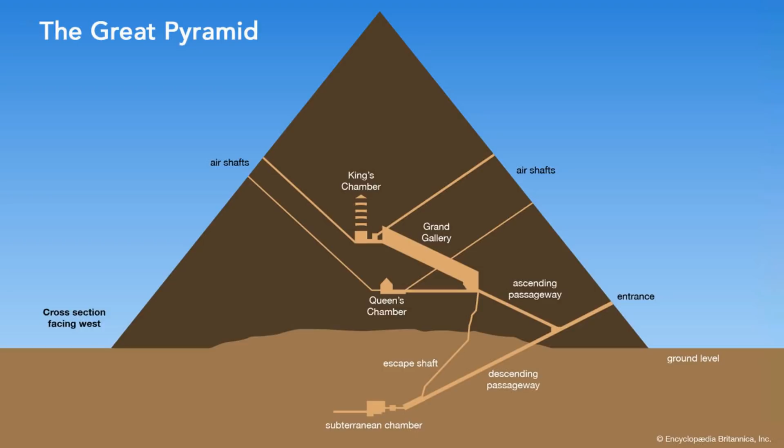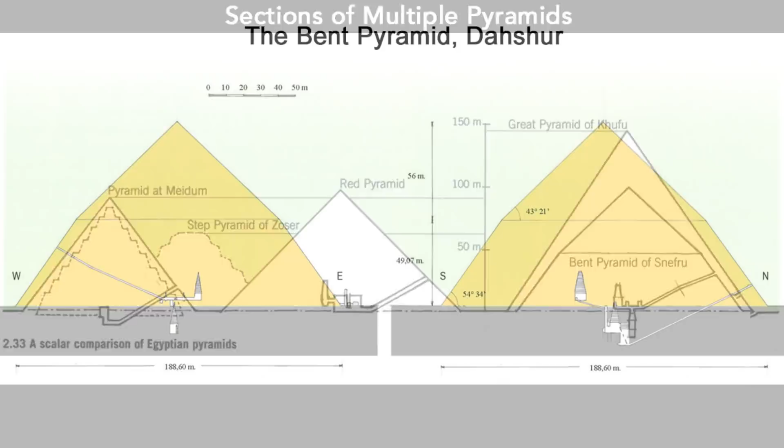The Great Pyramid of Giza is the only one that has connecting above and underground chambers and passageways, while other large-scale pyramids do not have the same internal structures as the Great Pyramid. They have minimal openings and remain almost entirely solid, sitting on top of underground chambers. Who would build such massive objects that one can't even use?

Even for the Great Pyramid, if the goal was to create chambers and passageways, then it was completely unnecessary to pile up all these stone blocks. If the builders just skipped every 10 blocks or so, a lot of labor would have been saved, and the structural integrity wouldn't have been compromised. Then why would the ancient builders choose to employ so much labor and building material? Unless it was their intention to pack as much material as possible into one place.

The way these pyramids were constructed indicates that they were designed to contain as many blocks as possible. This could be their function, which was to safely store enormous amounts of blocks. So what kinds of blocks need to be stored this way? In an earlier video, I pointed out that the large-scale shafts and underground chambers on the Giza Plateau might belong to an ancient underground mine.

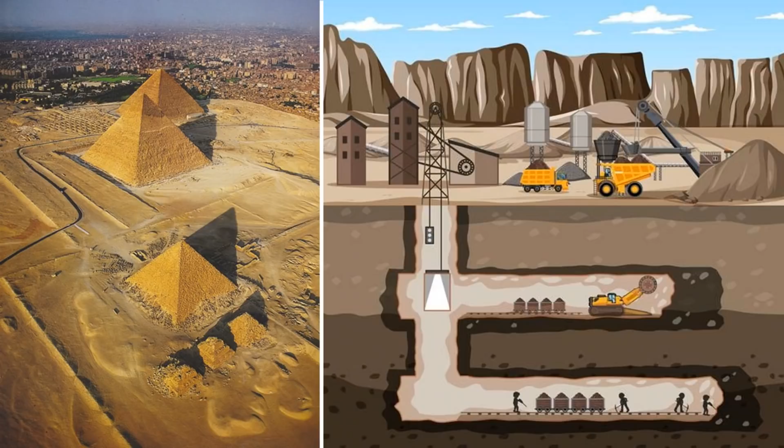These shafts are very close to the pyramids. The Great Pyramid shared the same tool marks with the Osiris shaft. It's conceivable there was a fundamental connection between the Giza pyramids and the underground mining system. If these ancient shafts on the Giza Plateau were excavated for mining, then what possible role could the pyramids have played in this complex operation?

Some have gotten my hints from the last video, my theory being the pyramids might be carefully constructed mine tailing and waste rock storage piles. What? I know. It might sound outrageous because the Giza pyramids are such pivotal symbols to us. Calling them mine waste dumps or slag heaps is just plain offensive.

Even though emotionally it's hard for me to accept, this tailing storage theory did derive from my research. I was never inclined from the start to conclude the way I did, but all my research points in that direction. Imagine if all humans suddenly disappeared today. Tens of thousands of years in the future, what would be recognizable to prove the existence of our civilization?

Skyscrapers? No. Modern structures require regular maintenance and repair. Once the maintenance ends, the buildings would eventually collapse. However, earthly structures such as mines and rock-cut caves would last the longest. The megalithic sites that stir up so much interest among us are probably the bare bones of a previous advanced civilization. If the Egyptian pyramids were really intended as mine waste storage, it actually proves that this ancient civilization was so advanced that today's technology is far from reaching their level.

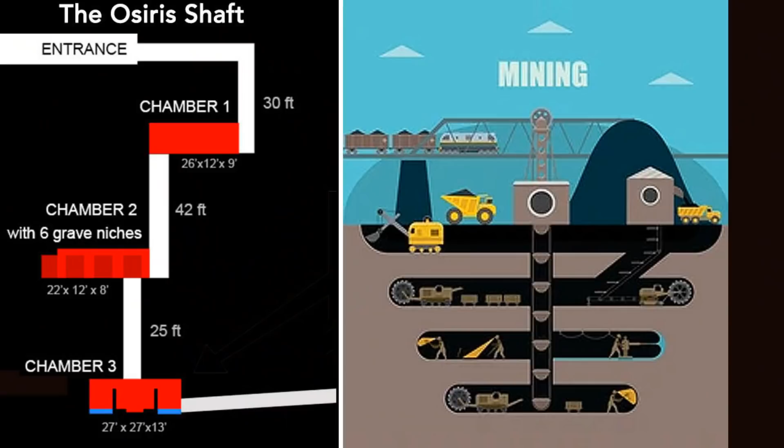Let me explain my reasons, and afterwards you can make a judgment call on whether my theory has merit. First, let's take a look at some typical mine sections. We can see the shafts, which are similar to the Giza shafts, the underground passageways to the ore, and on the ground we can see something in a pyramid shape. That's a pile of mine tailings or waste rock.

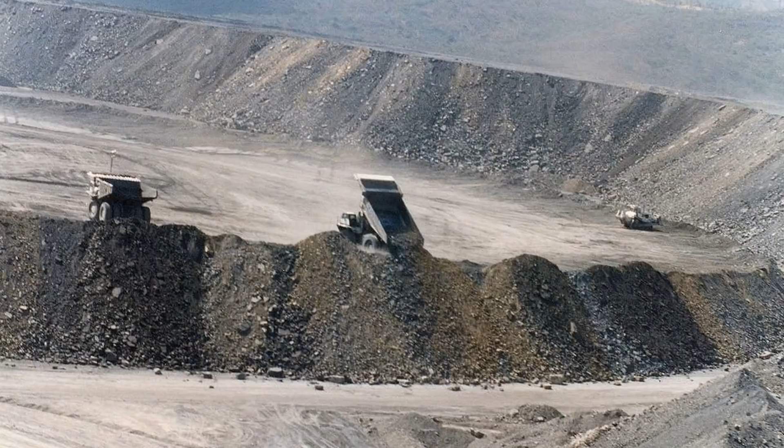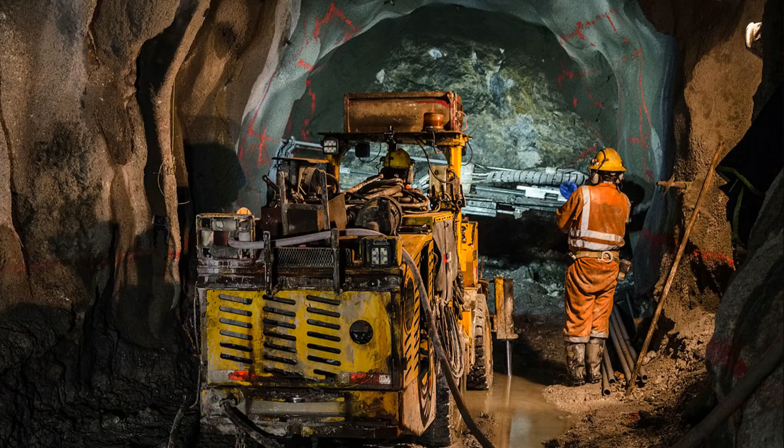Mining produces a lot of waste. When one catches a glimpse of any mining operation, in most cases, you'll likely only notice the mine waste because the majority of the actual operation is underground. When metal is mined, it typically is mixed with other rocks.

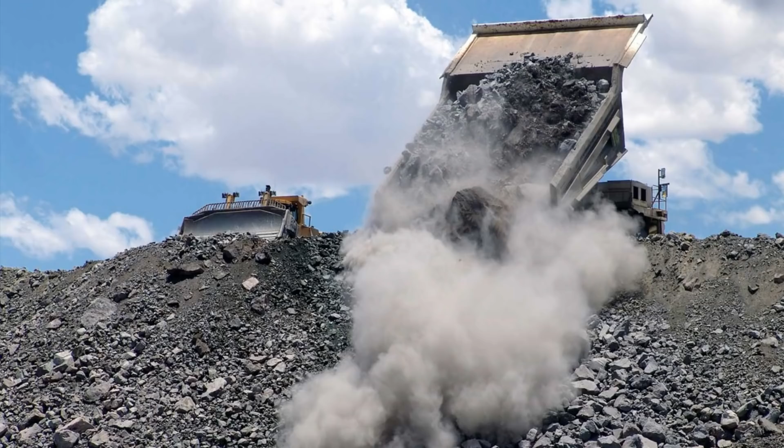Chemicals, such as cyanide, are usually used to separate metal from ore. Once the metal is removed from the rock, the excess rock becomes waste rock. Other than waste rock, the extracting process also produces mine tailings. Tailings are finely ground rocks and other mineral waste.

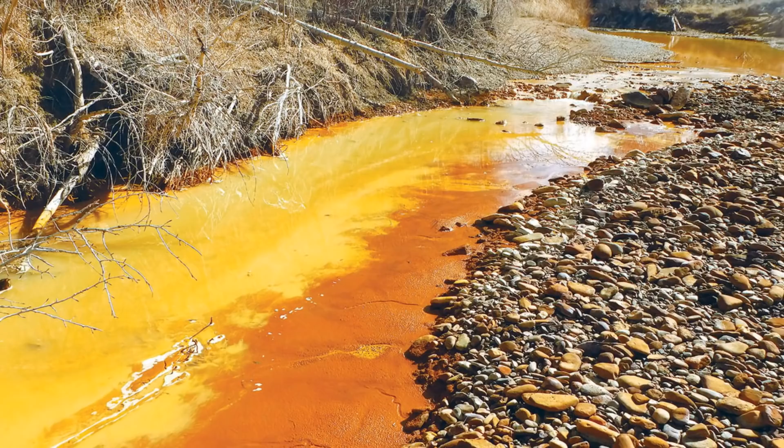Waste rock and tailings generally have little to no use and thus are disposed of. Due to the way minerals are processed, tailings and waste rock can contain concentrations of chemicals. If not properly handled, hazardous and toxic material from mine waste, such as heavy metals, acidic water, and chemicals, can be released into the environment. Because mines are usually operated in great scales, massive areas of soil, land, groundwater, and aquifers could be potentially polluted, which would cause major public health problems.

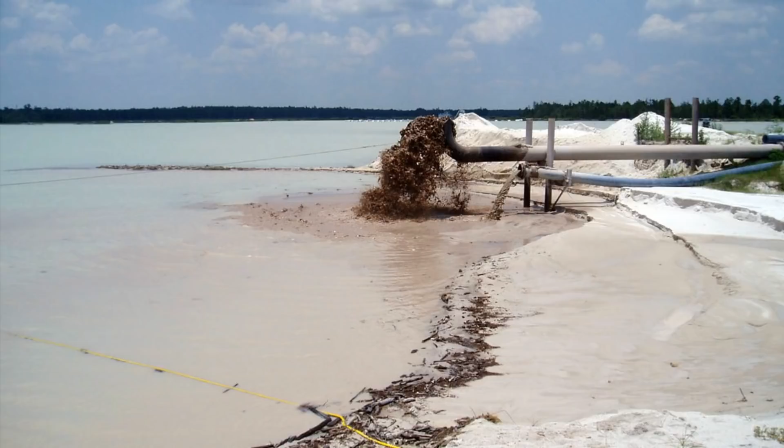Sadly, the mining industries have historically used the simplest and cheapest methods to manage mine waste, which is to dump them directly into rivers and lakes or pile them up on ground or in pits. Wind and rainwater then spread the contaminants to local and downstream soil and water sources. This is a disastrous way to store mine waste.

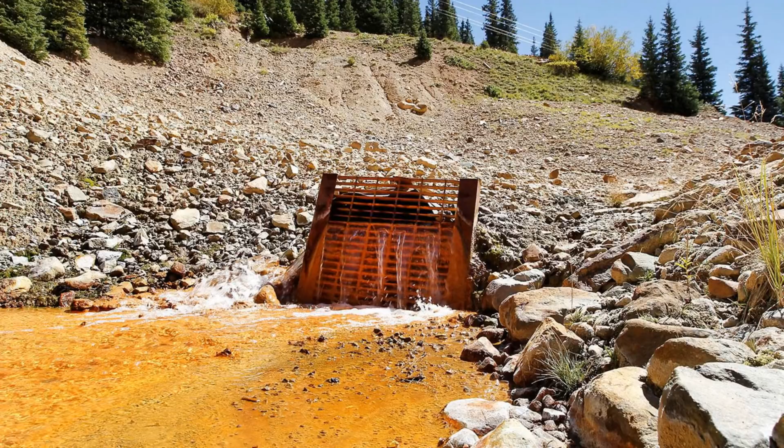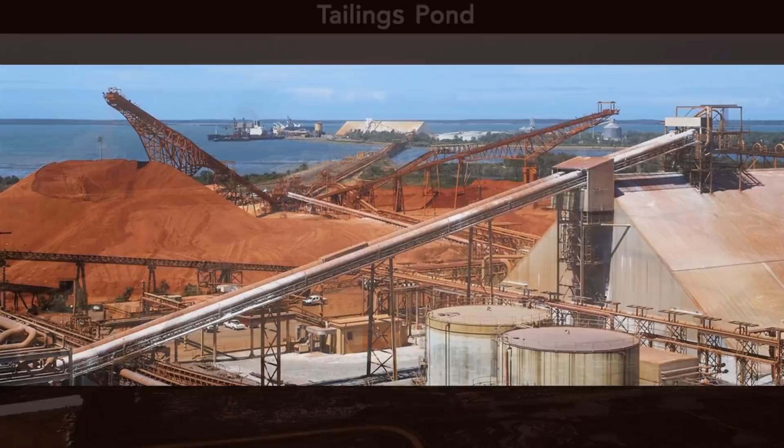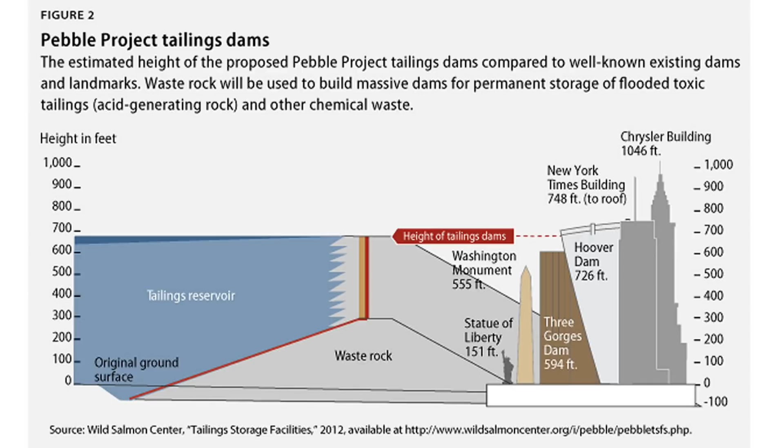Since the mid-20th century, the mine industries were pressured to eliminate older ways of waste dumping and look for safer, environmentally friendly technologies. The most common method of managing tailings today is stockpiling tailings slurries in tailings ponds. Some of the largest tailings ponds are over several miles in diameter and hundreds of feet deep. Tailings ponds are not only ugly to look at, but dangerous.

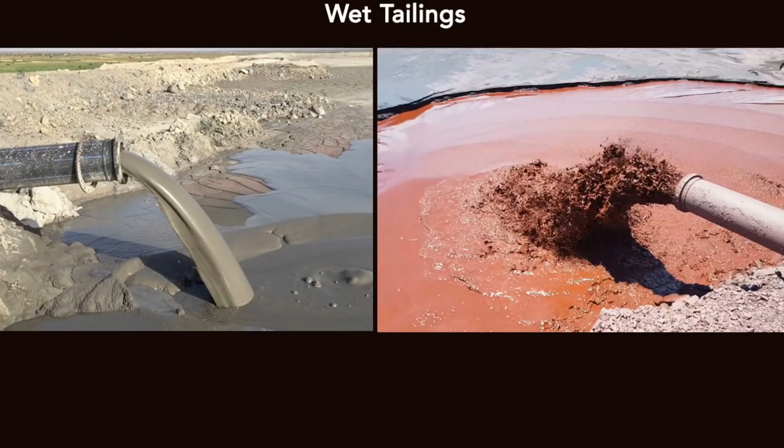There have been several catastrophic large tailings pond failures. In addition to the loss of up to several hundred human lives, these major failures have contaminated and destroyed large areas of land and caused major ground and waterway pollution. So building tailings ponds is not an ideal way to store mine tailings. How can we permanently and safely store mine waste?

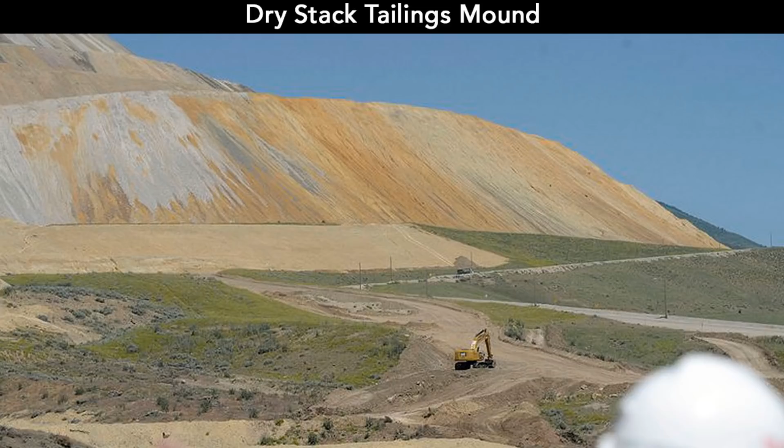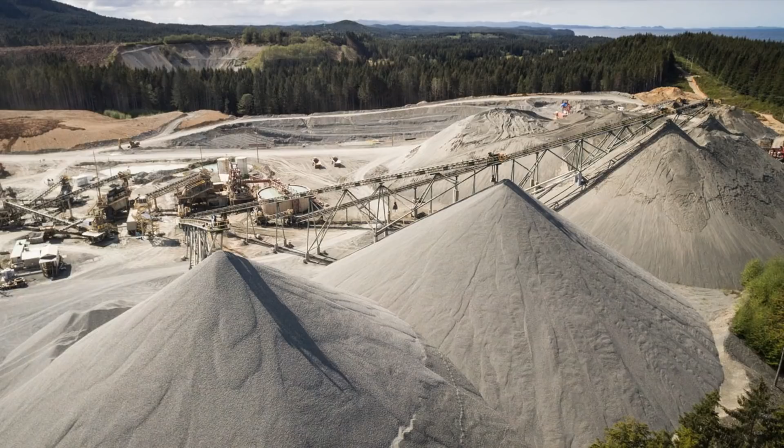In recent years, there is a new concept called dry stack tailings. In the dry stack method, filtered tailings are placed and compacted into a mound. Since there is neither a tailing pond nor dam, there can be no dam failure. Dry stack tailing storage has been found to greatly improve the structural stability of the material storage. Also, storing mine waste on the mine operation site is more cost-efficient and environmentally friendly because it saves transportation costs and limits the contamination footprint.

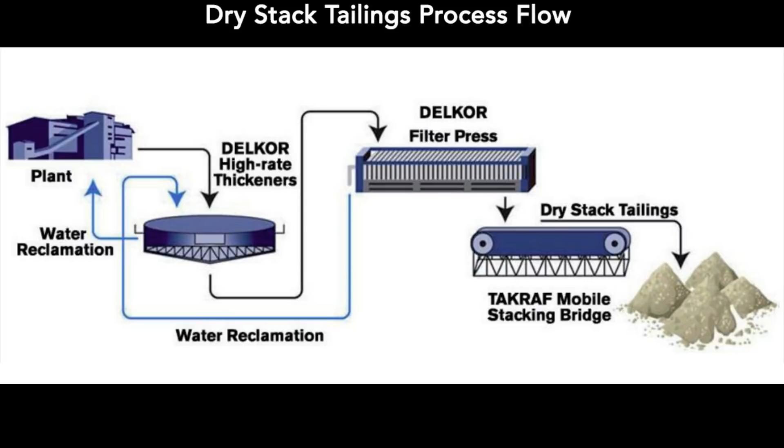The dry stacking and cemented tailing paste technologies can dispose tailings more effectively with a much less negative impact on the environment. This method can recover the maximum amount of recycled water and residual chemicals. So far, it's considered the most sustainable and efficient method of physical storage.

Speaking of cemented tailings paste technologies, I need to bring up a fascinating and plausible theory from Joseph Davidovits, a French materials scientist known for the invention of geopolymer chemistry. Professor Davidovits proposed that the pyramid blocks are not carved stone, but were mostly cast with a form of limestone concrete. There are multiple scientific papers with various material analysis results supporting the man-made pyramid block theory.

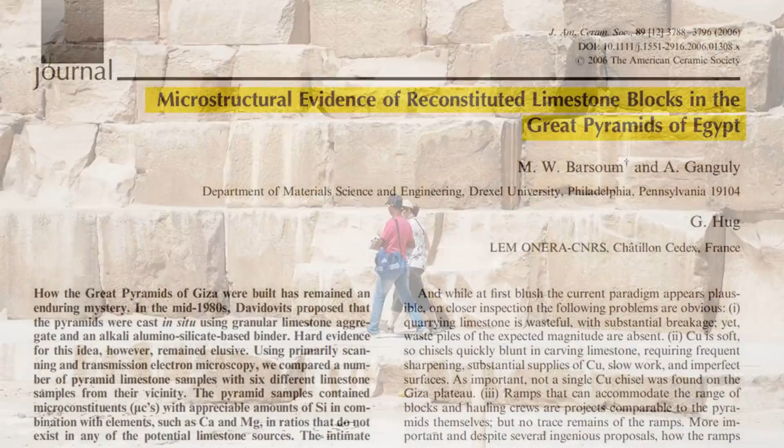For example, in this 2006 paper, Microstructural Evidence of Reconstituted Limestone Blocks in the Great Pyramids of Egypt, the researchers stated the pyramid samples contained microconstituents with appreciable amounts of silicon in combination with elements such as calcium and magnesium in ratios that do not exist in any of the potential limestone sources. The sophistication and endurance of this ancient concrete technology is simply astounding.

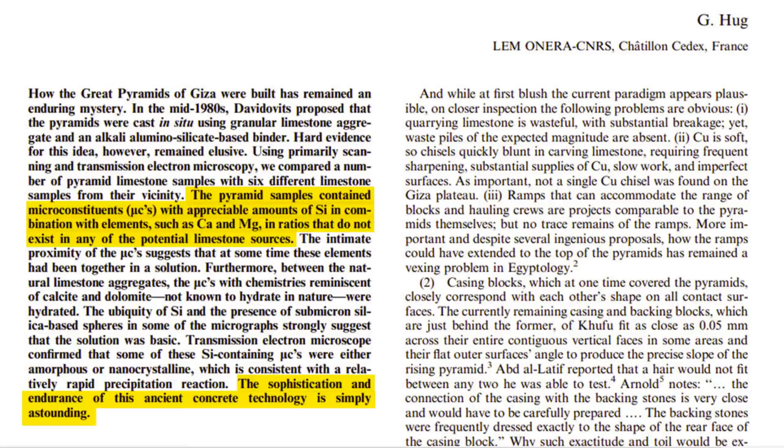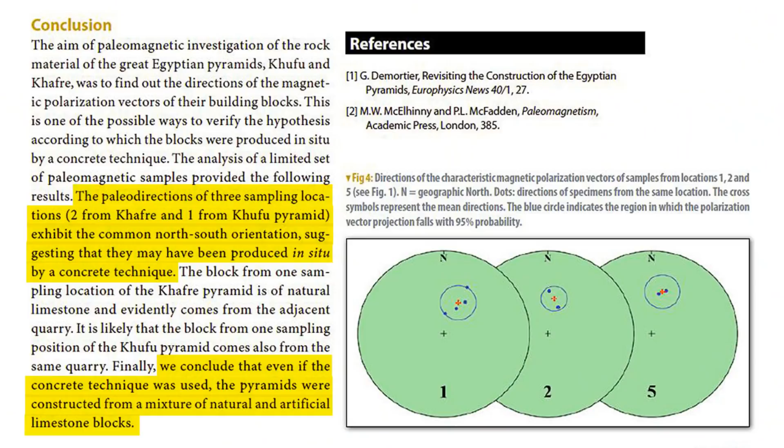Another study used paleomagnetic investigation of the rock material of the great Egyptian pyramids, Khufu and Khafre. The paleo directions of 3 sampling locations exhibit the common north-south orientation, suggesting that they may have been produced in situ by a concrete technique. Finally, we conclude that even if the concrete technique was used, the pyramids were constructed from a mixture of natural and artificial limestone blocks.

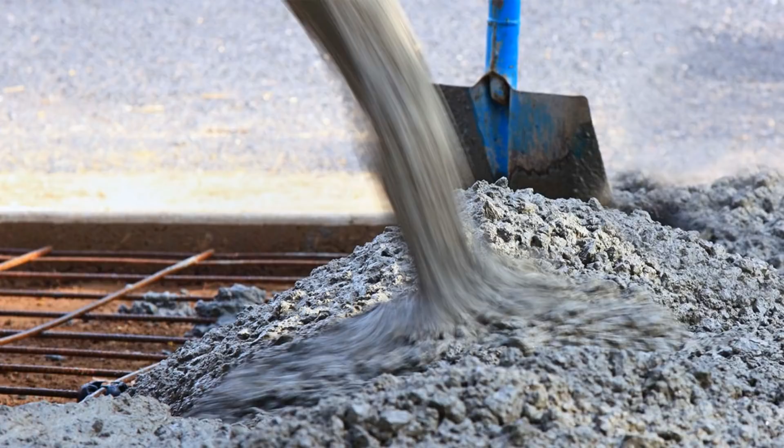Here I want to point out that the mine waste at the Giza Plateau probably had both waste rock and silty tailings. If a cemented method was applied to this mine waste, then the end result will be a mixture of natural and artificial limestone because the waste rock will be like aggregates in today's concrete.

Furthermore, not only are the pyramid core stones man-made, so are the casing stones. Scientists have analyzed the casing stone of the Bent Pyramid. The NMR results suggest that the casing stone consists of limestone grains from the Tura quarry, cemented with an amorphous calcium silicate gel formed by human intervention. Why would the ancients have used a different, higher quality, smooth material for the exterior casing stones of the pyramids? Please keep watching.

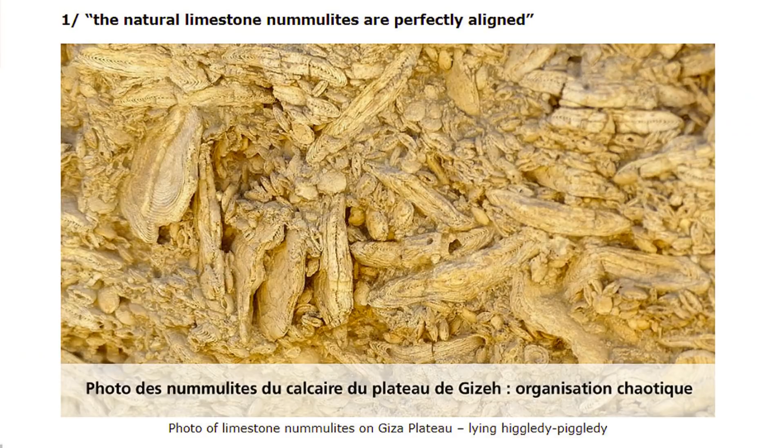Egyptian pyramid blocks tend to contain fossil shells and nummulite. Some were jumbled up together haphazardly and look artificially mixed.

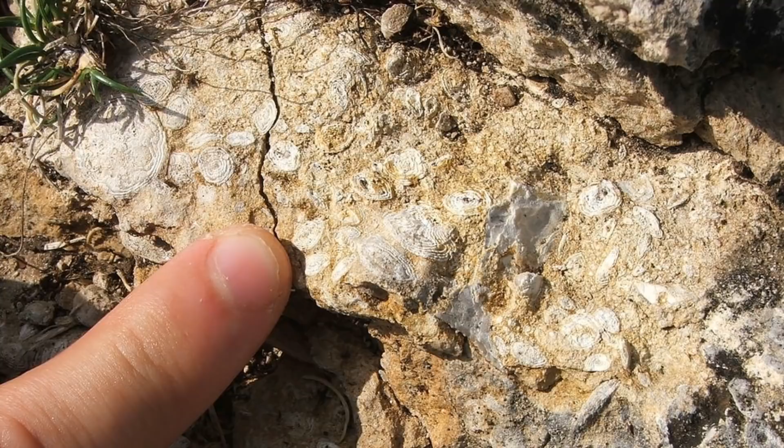Some were intact. Certain researchers argue that this is evidence that the pyramid stone is natural rock. I think the intact fossils might also come from waste rock. It's possible that the ancient miners combined waste rock and tailings with binding paste like cement, and the end result was blocks with fossils. Now, the cemented tailing paste technology is a new concept.

I haven't found any large-scale cemented tailing mounds in practice today. If it's a superior tailing storage method, how come there's no company utilizing it now? Large-scale waste rock and tailing storage is actually very complicated and requires in-depth calculation and simulation studies, because such storages are designed to permanently store potentially toxic materials. This is a great responsibility, and future failings of such structures can be disastrous with lasting consequences. Therefore, even though not glamorous, mine waste storage is critical and demands careful planning and design.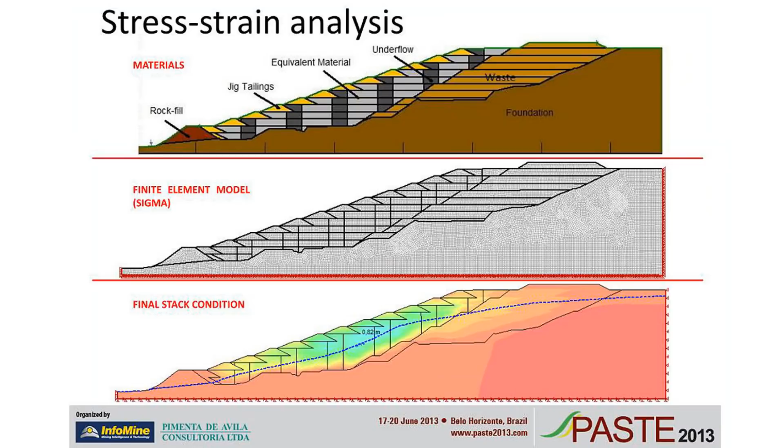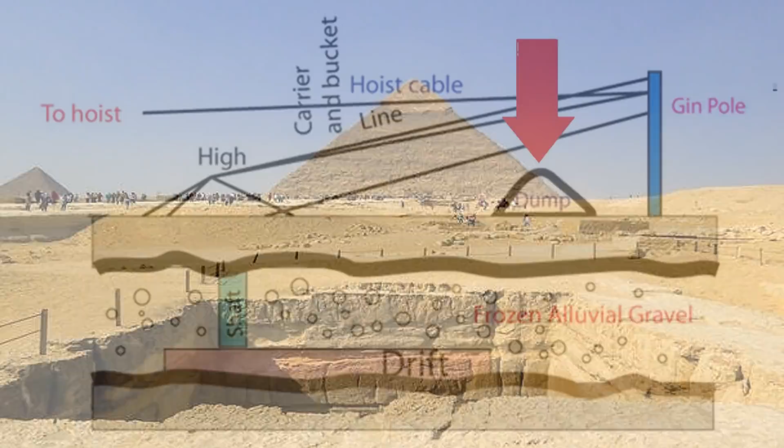Here are some conceptual models of dry stack tailings. These diagrams show crucial features that are comparable to the big pyramids of Egypt. I found 6 similarities between the dry tailing mounds and the pyramids. 1. Shape. A pyramid is the most structurally stable shape for projects involving large amounts of stone or masonry. Why did all the mine graphics show a pyramid-like shape? This is no coincidence. Pyramids have a consistently low center of gravity.

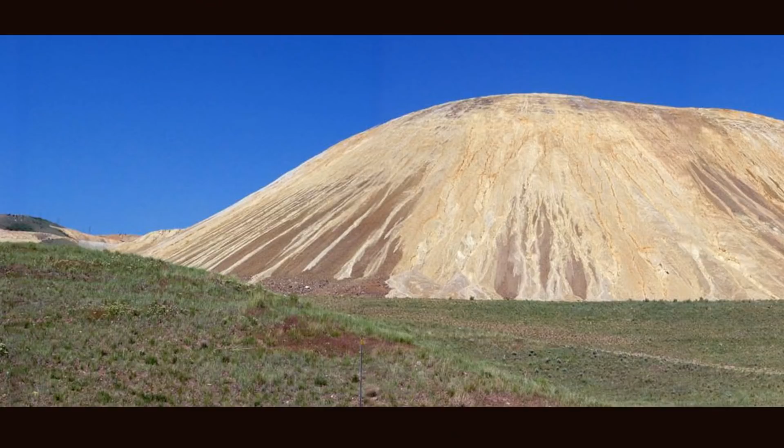The waste rock and dry stack tailings, like other sediments that occur in nature, would naturally build up in mounds because it's the most stable. The tailing mound design, in its best and most efficient form, would be in a pyramid shape, similar to the Giza pyramids.

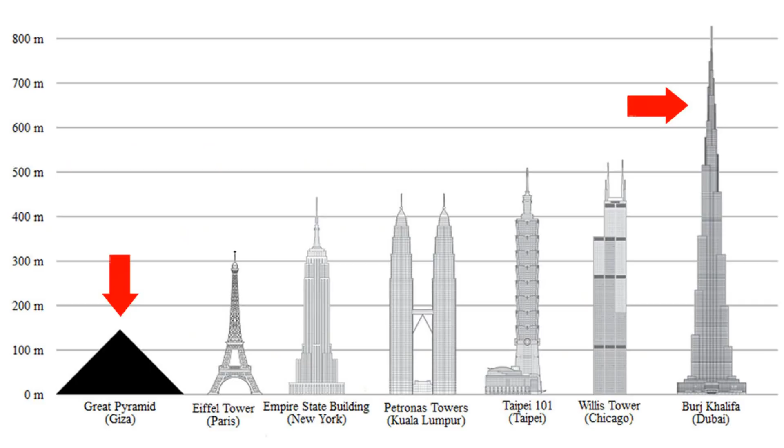2. Scale, size. The Great Pyramid was built with an estimated 2.3 million big stone blocks and weighs 6 million tons. The Khafre is slightly smaller, but it's solid, and so is the Menkaure. Therefore, the 3 Great Pyramids on the Giza Plateau together easily weigh over 12 million tons and contain over 4 million large blocks. That's 24 times the weight of the tallest tower in the world, Burj Khalifa. What kind of structure would need this astronomical amount of solid material?

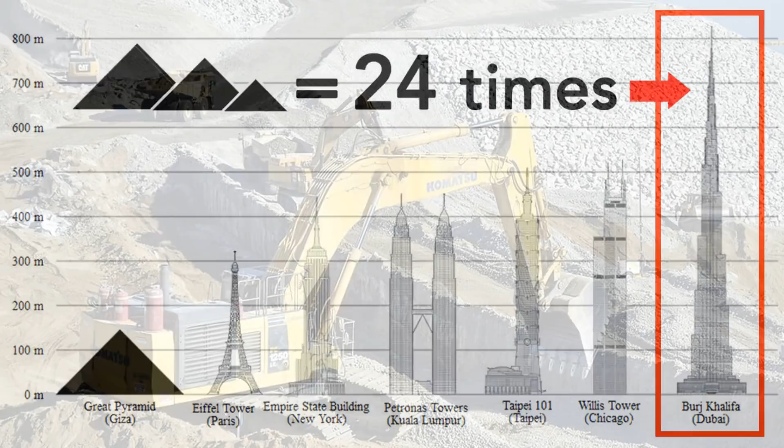On the other hand, mining can produce overwhelming amounts of waste. Today, some large mining operations produce well over 100,000 tons of dry tailings per day, which means one of these mines can produce enough material to build the 3 Great Pyramids in 4 months. Let's assume for a minute that the Giza mining system was similar to a modern mine with an operation time frame of 20 to 30 years. It's reasonable to also assume that the mine would have generated enough waste material which would be comparable to the sizes of the Giza pyramids.

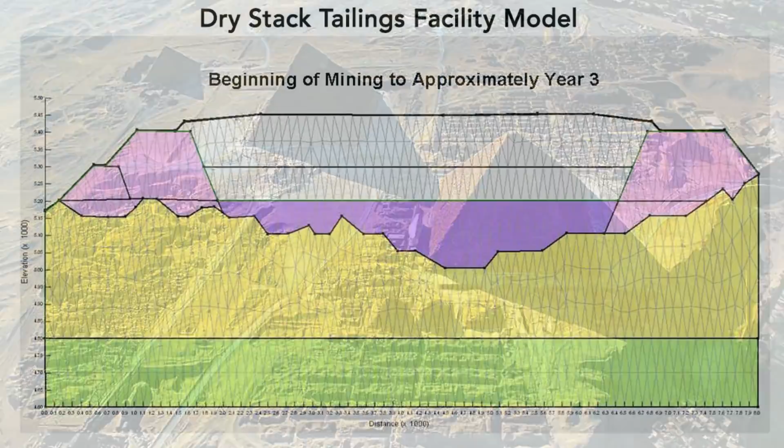Tailing mounds are built up in phases. As the mining goes on, new waste material will be treated, consolidated, and moved to an ever-growing pile. I think this could be the same method for how pyramid blocks were placed.

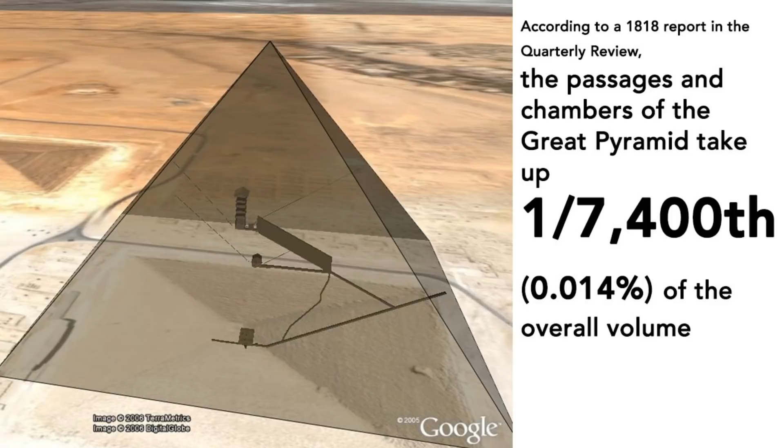3. Solid feature. Most ancient pyramids in Egypt are predominantly solid with small fractions of interior openings. The Great Pyramid has the most elaborate interior system, but considering its overall mass, is still pretty much solid. From a construction point of view, it doesn't make sense to use so much building material to construct these enormous solid structures with so little usable space, unless the goal was to pack as much material as possible. If these pyramids were meant for storage of mining waste, then we can explain their solid features.

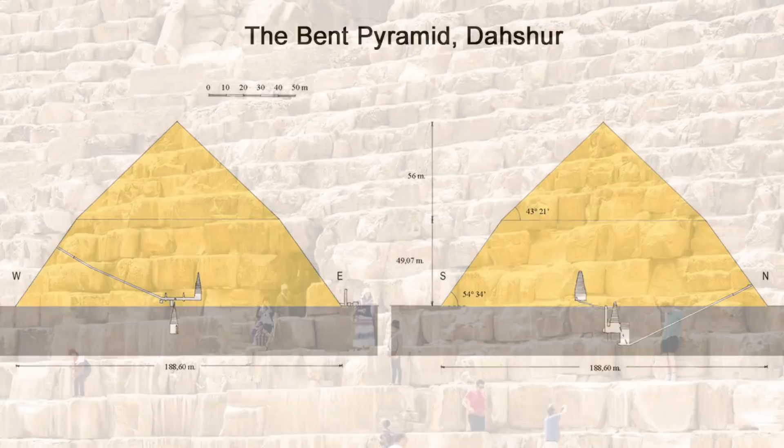By the way, the majority of the stones at the Great Pyramid are local limestone from the Giza Plateau. They are not uniform in size or shape and are only roughly dressed. I think this makes sense, since the blocks of cemented waste rock and tailings don't need to be perfect.

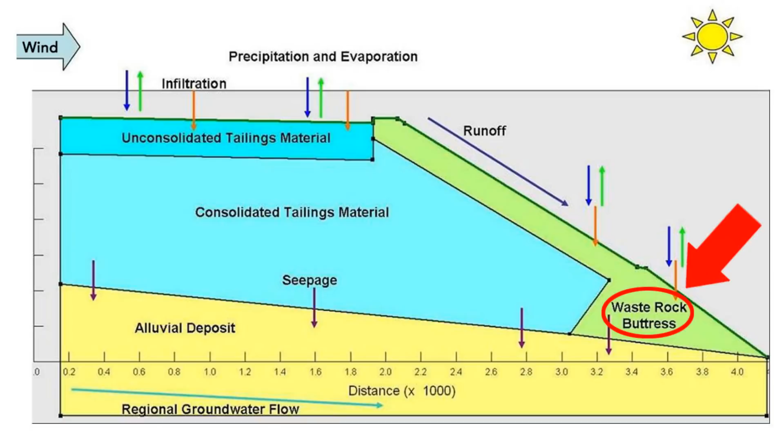4. No foundation. Pyramids have no foundation and are built directly on the ground. The Giza pyramids are sitting on a limestone bedrock, and other pyramids in Dahshur, Abusir, and Saqqara also have no foundations. The dry stack tailing mounds have the same characteristics. Moreover, from the tailing mound designs, we can see buttresses at the bottom corners and the outside layer of the mound. Now, that's the 5th similarity.

5. The use of casing stones and corner buttresses. We know that the pyramids originally were all covered with fine quality casing stones. Some of the casing is still intact on the Khafre and the Bent Pyramid. As I mentioned earlier, this light-colored, smooth casing stone is another form of concrete or geopolymer.

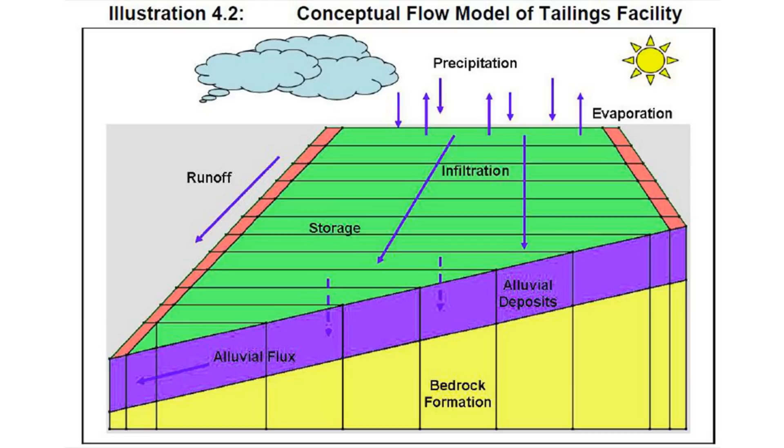Now, let's take a look at the dry stack waste rock and tailing mound. Such mounds are permanent storage of the compacted or cemented waste material. Like all other large-scale masonry structures, water seepage would affect the structural integrity, which is to be avoided. Besides that, the runoff and seepage water flowing through the waste mound may get contaminated with residual chemicals, which will be released into the environment. This is another reason to prevent water from seeping into the mound.

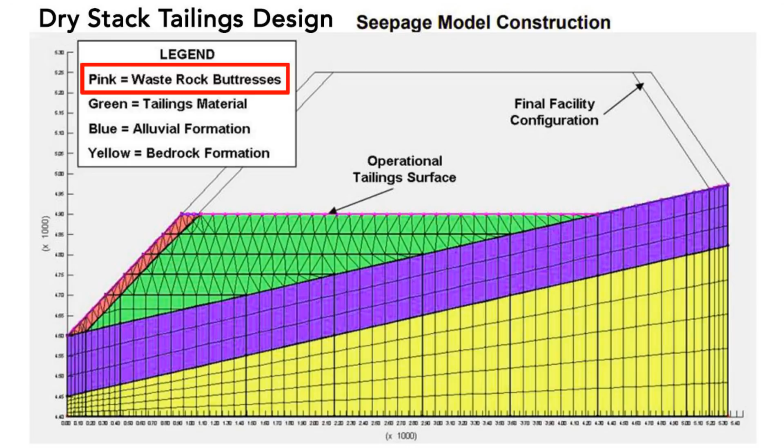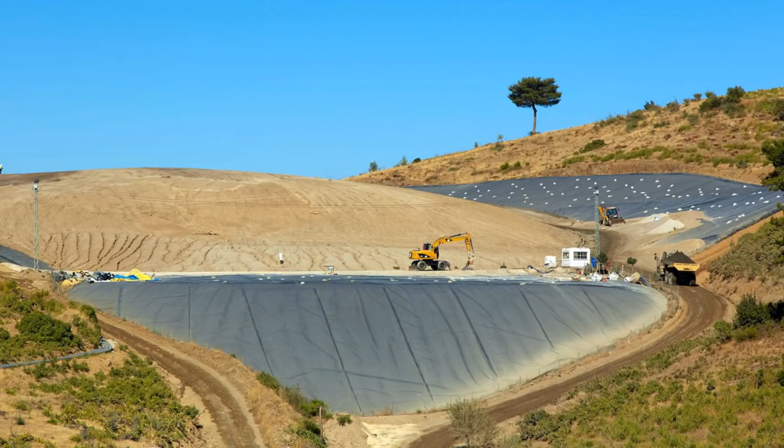That's why the exposed exterior layer of a waste rock and tailing mound is designed to have a compacted rock buttress, which works as a reinforcement as well as a less permeable layer against water infiltration and seepage. It's similar to having a tarp over or under the waste mound, so rainwater wouldn't get contaminated, which could negatively affect the groundwater quality. Tarp is actually an effective way to protect the groundwater from getting contaminated from the mine waste, though it's unsightly and temporary.

The pyramids were covered with fine casing stones, which was a long-lasting and elegant solution. Another thing, the pyramids of Khafre and Menkaure both have granite casing at the lower bodies. Granite is a stronger stone and an impermeable layer to protect the pyramid blocks from the elements. Even though we don't have the technology to cast granite today, the unfinished casing stone at the Menkaure shows characteristics of casting, such as these knobs and bulging rounded shapes. Considering how ingenious these ancient pyramid builders were, it's possible that they obtained the technology to cast or melt granite as well.

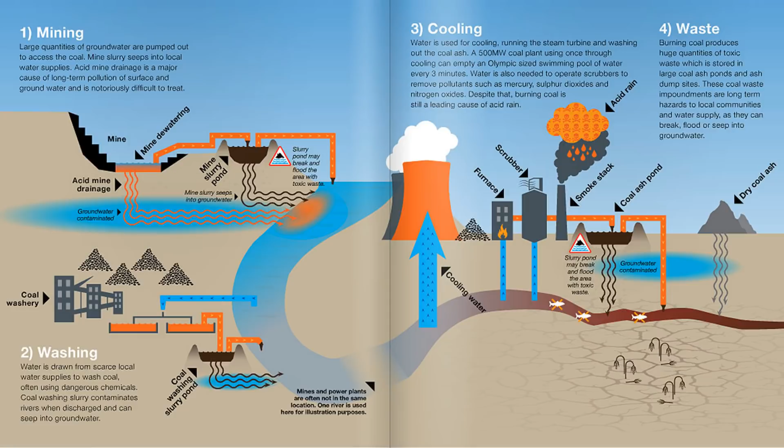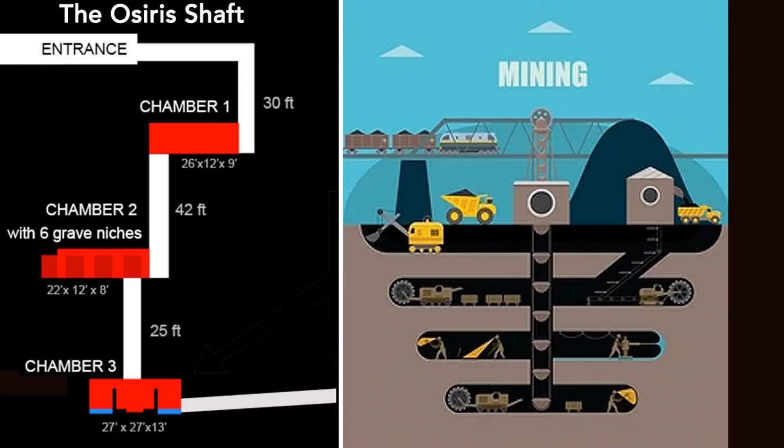6. Location. Today's most cutting-edge mine companies have started to evaluate and plan the total life cycle of mining and tailing management. It's more cost-efficient to have the mine waste treated and stored on-site. Limited footprints, less contamination, and fewer disturbances to the surrounding environment are the end results of better planning. If the Giza shafts were indeed a part of an ancient mining system, then it's conceivable that the waste storage was placed on-site to eliminate further impact to the environment.

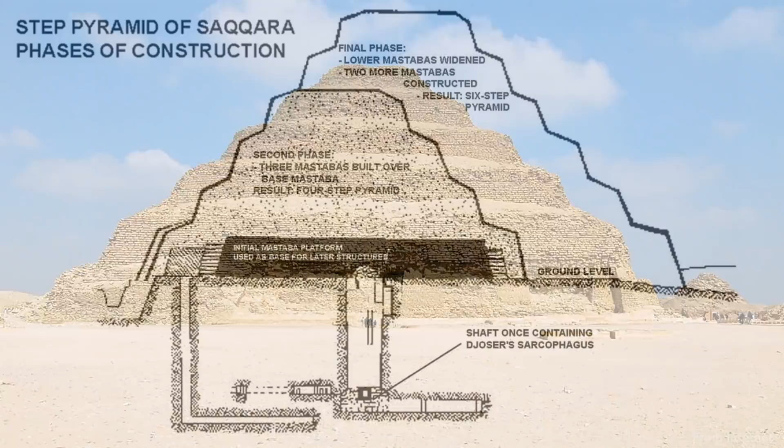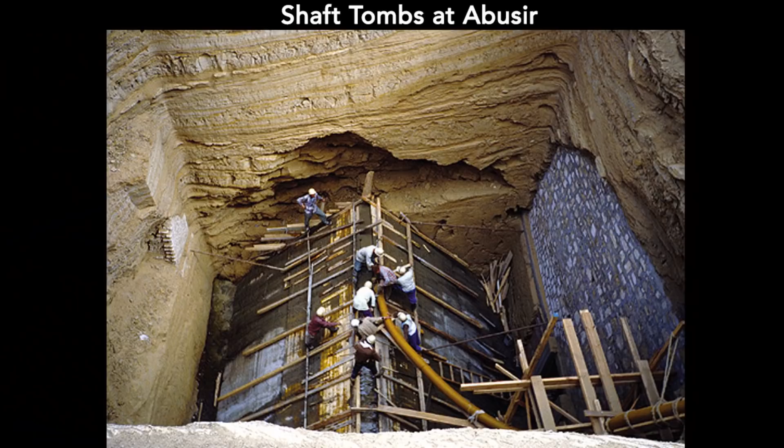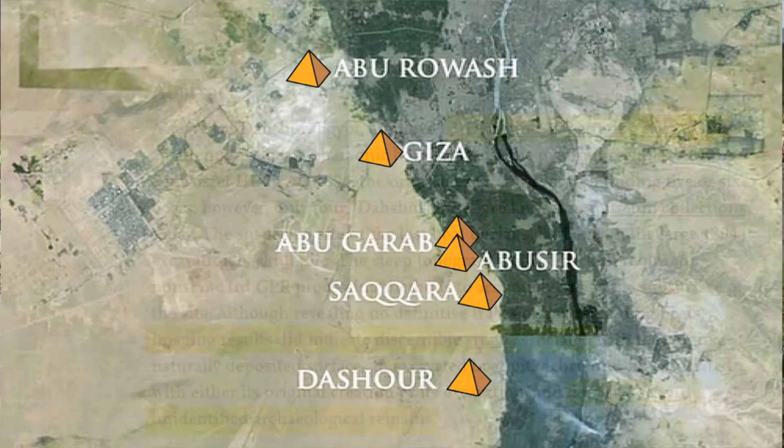The Step Pyramid also has extensive underground passageways and multiple shafts. The 3D model of the underground system of the Step Pyramid is very much like an underground mining design, isn't it? Like the Osiris shaft on the Giza Plateau, there are Persian shafts right by the Pyramid of Unas in Saqqara. At Abusir, multiple underground shaft tombs are present. Ground-penetrating radar at Dahshur also indicates the existence of underground archaeological remains. Perhaps all these pyramids were related to mine operations.

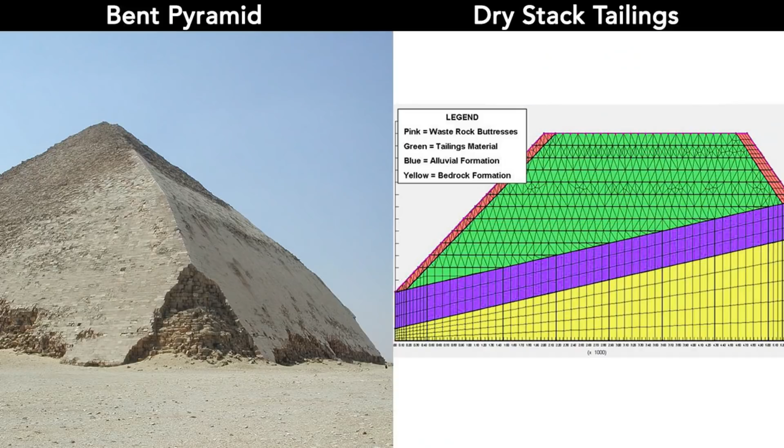Okay, now I have shown you 6 similarities between the pyramids and the dry stack waste rock and tailing mound. We can see that the shapes and sizes of the two are very similar. They're mostly solid structures with no foundations. They both have less permeable and buttress-like exterior layers. Plus, they're usually located near complex underground systems. Seriously, it's not easy to find another type of structure that shares these uncanny comparable features with these pyramids. If you can think of something else, please let me know. I'm open to all thoughtful viewpoints on this subject.

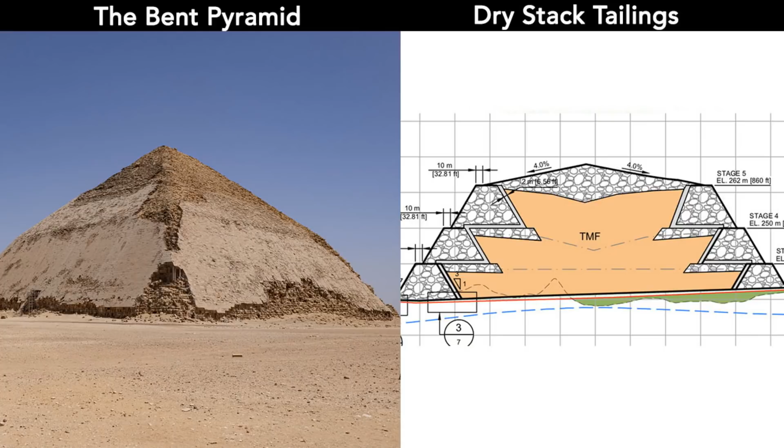Pyramids being waste storage sites is a provocative theory. Considering today, the cemented tailing mound is still at a conceptual stage. This means the ancients who actually built many large pyramids were way ahead of us. They were not only more technologically sophisticated, but also environmentally conscious. This lost advanced civilization which built the pyramids could be very different from us, physically, mentally, and technologically.

But I think it's universal to first consider the practicality and cost efficiency of building something so tremendous as a pyramid before investing the resources and time. Whether the ancients used sound waves, frequencies, anti-gravity power, or electricity, the end goal of such projects should be able to justify the overall required effort put into it. What do you think? By the way, this is not my entire argument. There is more to be discussed, such as what was mined on the Giza Plateau, which I will save for a future video.